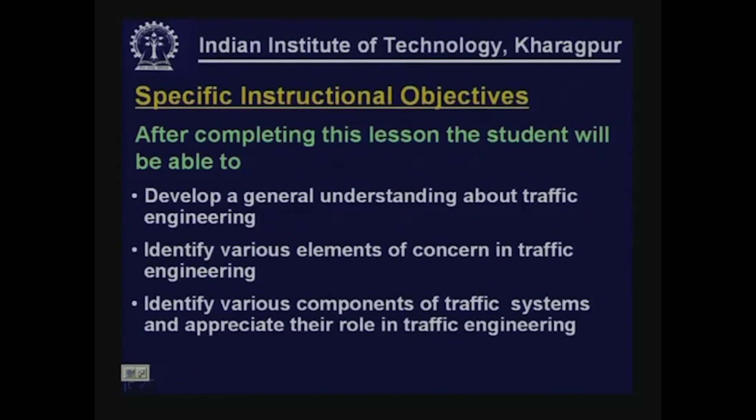Introduction. Let us first try to understand the subject area traffic engineering. What is traffic engineering? Traffic engineering is that phase of engineering which deals with safe and efficient movement of people and goods on streets and highways. So it deals with safety and efficiency of movement of people and goods on the road system, that is streets and highways. The Institute of Transportation Engineers defines traffic engineering.

Traffic engineering is that phase of transportation engineering which deals with planning, geometric design and traffic operations of these three aspects on the road system, that is roads, streets and highways, their networks, terminals, abutting lands, and relationships with other modes of transportation. That is how the Institute of Transportation Engineers defines traffic engineering.

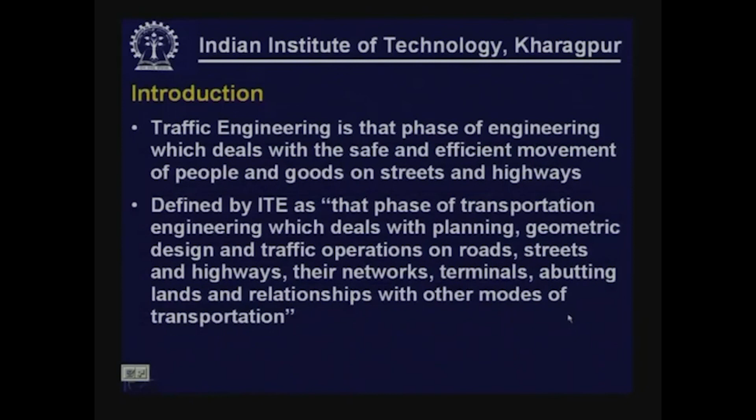With this background definition, let us now try to address some of the basic issues in traffic engineering perspective, basically to create our mindset about the traffic engineering elements.

First issue is whether it is person movement or vehicle movement. Often we face this confusion in traffic engineering: what is our primary concern, whether it is person movement or movement of vehicles. It is worthwhile to mention that the real concern is movement of people and goods.

So moving people and goods is the real concern. Obviously, movement of vehicles is just a way of accomplishing this. So primarily people need to move from one place to another place, and goods are to be transported from one place to another place. So the primary concern is movement of people and movement of goods.

How are these people or goods transported? Vehicle is the means for that. They are transported in vehicles. So vehicle comes afterwards, and it is the resulting volume that is creating road congestion and many peripheral problems in traffic engineering.

But let us not forget that the primary concern is movement of people and movement of goods. Of course, it does matter the way it is transported in vehicles. So we cannot really deny the role of modal split, that means how the demand is distributed into different modes and other modal characteristics. So it is worthwhile to mention that it is necessary to appreciate the mode of transport and type of roadway used for moving people and goods.

What is the effect of mode? What is the effect of roadway type? What is the effect of mix of traffic? All three aspects are also important.

So obviously, the effect of roadway type is also important, and we cannot deny the effect of mix of traffic, or traffic composition, in the overall traffic engineering perspective.

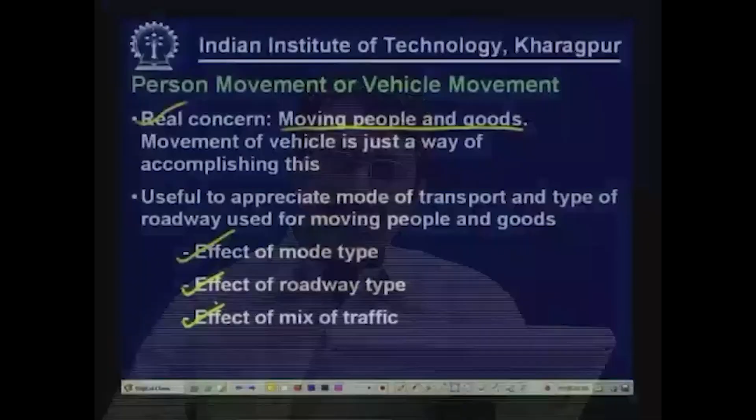The way demands are distributed, it is the same road space which is used by cars, buses, commercial vehicles - light commercial vehicles and heavy commercial vehicles. So the way the road system accommodates traffic, the nature of traffic, the mix of traffic - it really matters and influences the performance and overall characteristics of traffic operation. So effect of mode, effect of roadway type, and effect of traffic mix - all three are very important in traffic engineering perspective.

Now the second question is goods movement and or person movement. In many occasions we think road is primarily for passenger movement. We see cars getting congested, and with car volume, roads get congested. Presence of a few commercial vehicles like trucks or other heavy vehicle types even aggravates the traffic congestion problem.

So we apparently think road is primarily for movement of passengers and trucks are some sort of disturbing elements, because they really do create problems. But let us not forget that goods transportation provides the lifeline to any community. It directly adds to economic development. It is necessary to transport raw materials and also the finished product. Both are important.

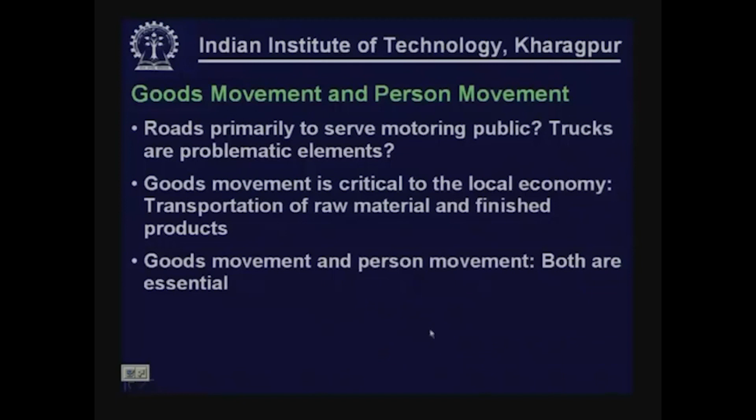Next is the mix of vehicles in person movement. Person movement is normally accomplished by sharing the demand into different types of modes. In traffic engineering, our focus is generally on movement on streets and highways, excluding for the moment rail, water and air transportation. So within and between cities and towns, people normally move in a mix of vehicles, namely private vehicles, buses, paratransit systems, bicycles, and even walking.

Different modes of transportation exist, and each mode has its own utility in the overall system, from walking to movement by bicycle or non-motorized transport, to faster travel like car and bus movement. Every mode has its own contribution in the overall transportation system. The beauty of the road system is that the same road space must be used for movement of various vehicle types. In certain contexts we may restrict some vehicle types during certain periods, but all vehicle types are to be accommodated.

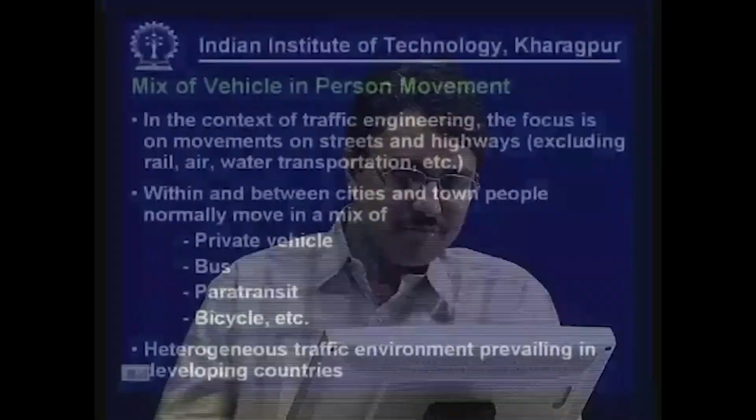You have system of facilities, basically the road system. We shall discuss each of these components in detail. So we have the supply side, or system of facilities, and demand, and they interact with each other in a transportation system through the interface of control. This interaction creates operational performance, congestion, and all sorts of other things. Influencing the demand is another aspect - can we influence the demand, should we influence the demand, and if so, in which ways? Then measuring the performance of the overall transportation system, and transportation systems management.

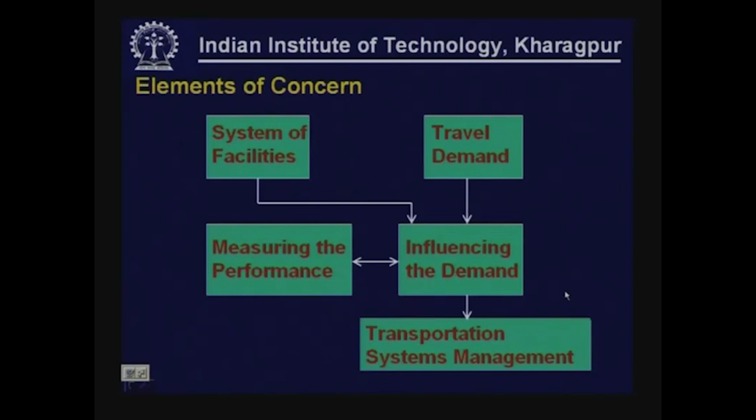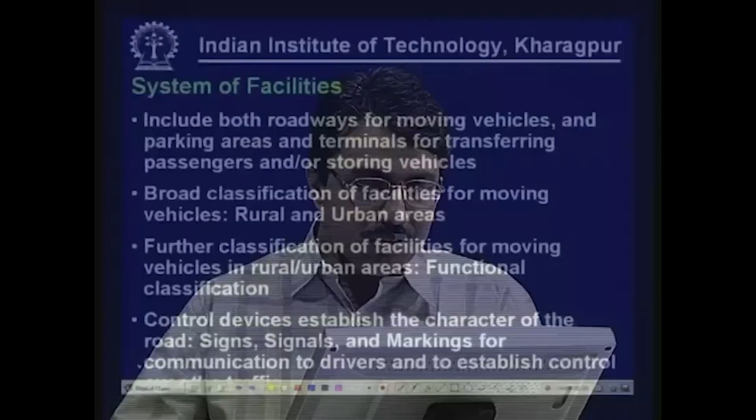So these are the five major elements of concern, and let us try to understand each in detail. First, system of facilities. System of facilities normally includes the physical road system - it is essentially the supply side of a transportation system. It includes roads used for moving vehicles, parking areas, terminals and other physical facilities, and also control devices present on roads, for example signs, signals, markings - these are all physical facilities.

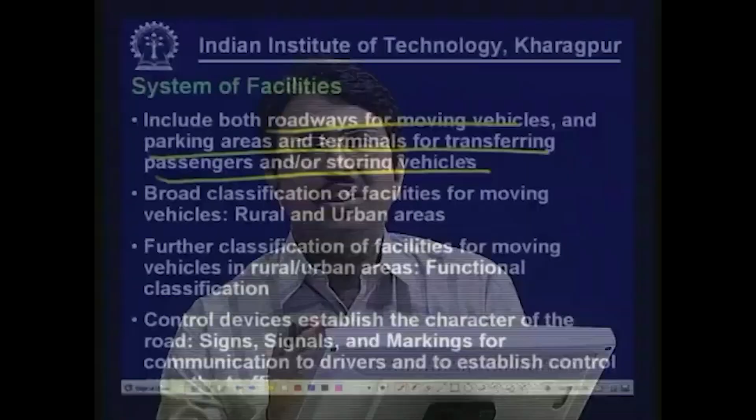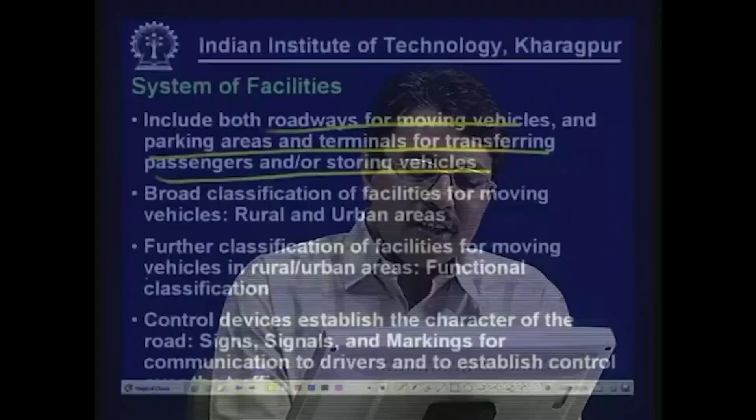So system of facilities includes both roadways for moving vehicles, and parking areas and terminals for transferring passengers and or storing vehicles. Now, road systems in urban areas and rural areas are fundamentally different - the type of system, the purpose, they all may be different. So primarily we consider two types of road systems, urban and rural areas. Rural essentially means non-urban areas, so we normally call them rural roads or rural area highway roads. Further classification of facilities for moving vehicles in rural and urban areas is done based on functional classification.

That is again an important aspect. Not all roadways, even in an urban area or a rural area, serve the same purpose. Two aspects are important. A road may serve the purpose of providing access, and it may also serve through traffic movement, meaning faster movement of long distance traffic. Often these two aspects are important, how much a road provides access and to what extent it handles through traffic movement. Measuring these two functions and their level of influence defines the functional classification of roads.

We define a hierarchy of roads, where in some cases the whole objective is through traffic movement, in the extreme end the whole purpose may be providing access, and there could be other types of roads which serve a combination of both aspects, some more, some less. So that functional classification is important. We shall also learn the functional classification in due course of time.

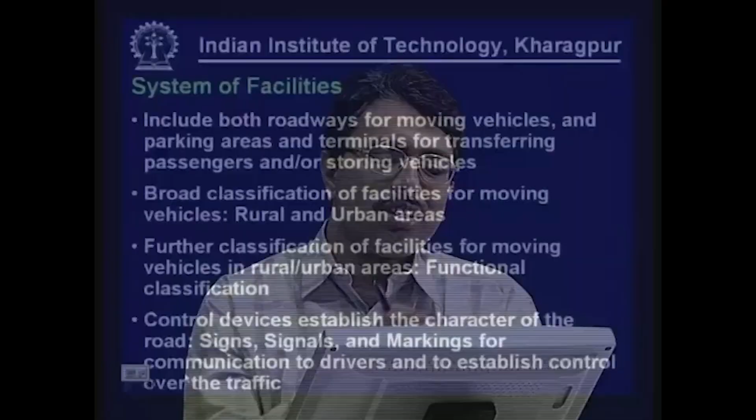Then we have control devices. These generally establish the character of the road. These control devices include traffic signs, traffic signals, road markings, and all these are essentially for communication to drivers and establish control over the traffic. Controlling the traffic or looking at the operational aspects of the traffic is also important, how to improve the efficiency of traffic operations for a given facility and a given demand system. So there the control devices will play a vital role. This also defines the system of facilities.

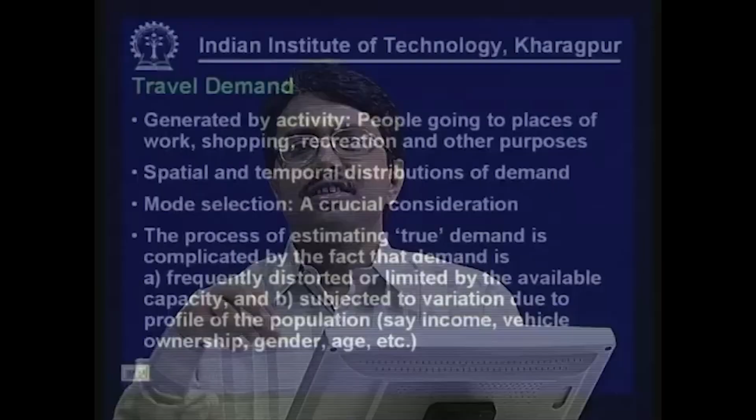Then the second aspect is the travel demand. We all know that demands are generated by activities. People live somewhere, they need to travel to various places, places of work, places of shopping, places of recreational facilities. So for different purposes they need to travel, and there is spatial distribution. Residences are located somewhere, activities are located somewhere, and that is what generates the travel demand. The spatial distribution of activities generates demand. Because demand is there we need to provide supply, and supply also influences the demand pattern, so it is a two-way interaction. It is basically generated by activity, and both spatial and temporal characteristics of distribution of demands are important.

Let us try to understand the spatial and temporal distributions of demand. Because facilities are located in different places, demand has also got a spatial dimension. If offices are located somewhere in the CBD and residences are located in the suburb, then it is obvious that during the morning peak hours the travel will be from residences to the CBD or office area, and in the evening people again need to come back. So there will be demand between office areas or the CBD and the suburb.

Not all places are equally loaded over the whole period of time. Some roads are loaded, some are free, and at some time there may be congestion, at other times no congestion on the road. So it varies over distance, over space, and it also varies over time. Going back to the earlier example, people going to office, maybe between 9 to 10 all the roads towards the CBD area will be congested. At 12 o'clock those roads may not be congested, because primarily they serve demand towards the CBD area or where main offices are located. So the same road that is highly congested at 9 o'clock may have no congestion at 12 o'clock. Demand has both spatial and temporal characteristics, and this must be understood clearly to address traffic engineering and related issues.

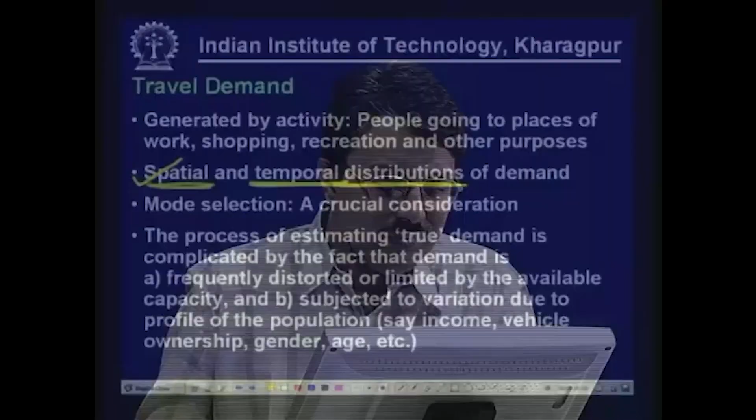As I indicated earlier, mode selection is a crucial consideration, because for the same person or passenger demand, mode selection or mode split decides the actual traffic volume and therefore the actual level of congestion on road at a given time.

Remember that the process of estimating true demand is often complicated by the fact that demand is frequently distorted or limited by the available capacity. All physical facilities are capacitated. A road can handle only a certain number of vehicles or a certain volume of vehicles. So even if the demand is more, the road cannot accommodate traffic volume higher than its capacity. The demand may be distorted or limited by the available capacity.

Demands are also subject to variation due to profile of population, such as income, vehicle ownership, gender, age, and other socioeconomic attributes. If you see the trip rate, the per capita trips made in a day, it is influenced by income and by car ownership. Normally high income households make more trips. Higher personal income means more trips, higher vehicle ownership means more trips. So all these socioeconomic characteristics also affect or influence the demand pattern, and that makes the whole demand estimation a complex task.

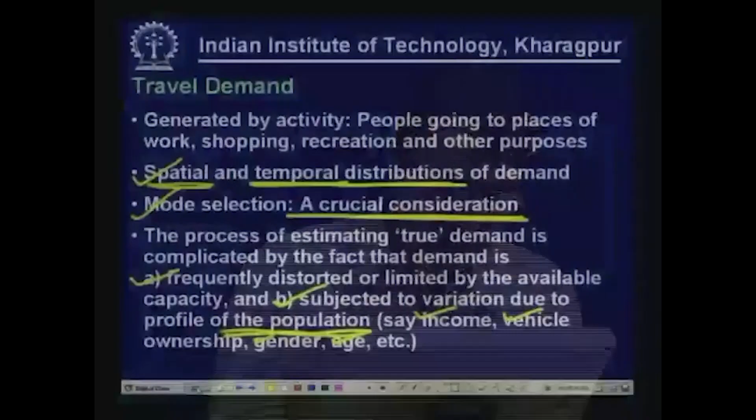Next is influencing the demand. Now, a traffic engineer's job often starts with a given pattern of demand.

This is just an example. If we see the volume of traffic on a road versus time, you normally get a pattern like this, sometimes with two peaks. In the morning when people are going to offices, the traffic volume is more, the road is congested, then it comes down, and again in the evening when people are coming back or going to shopping or recreational places, the demand is more again.

It is interesting to note that the capacity of a system is fixed, as shown by this dotted line. This is a fixed value. So capacity is fixed, while demand most of the time is maybe lesser than the capacity. At night, demand is practically nil, but capacity does not change, it still remains the same.

So it is only at certain hours of the day that demand becomes more than the capacity, and congestion is created. So it may be worthwhile, wherever applicable, to think of influencing this demand pattern to make better use of the available capacity.

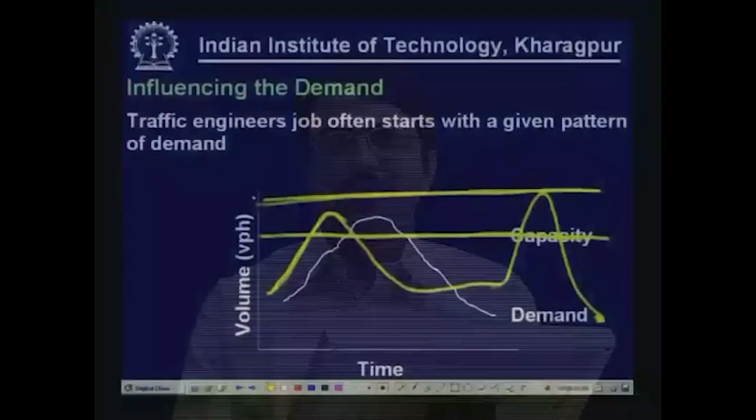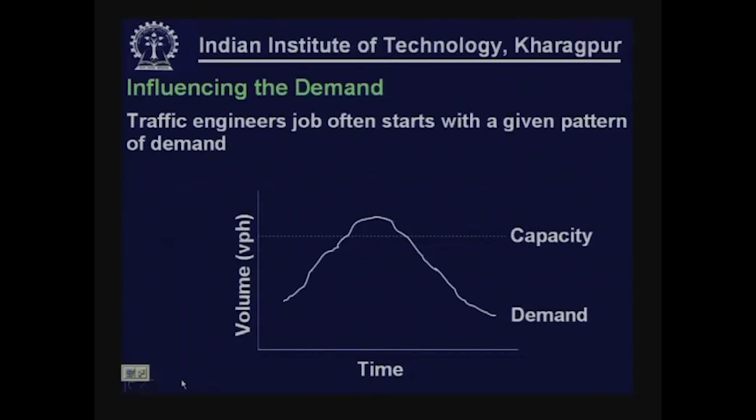Rather than that, can we touch or influence the demand, so that within the given road system, within the available capacity, we can have better utilization of that capacity? That is why it makes sense to influence the demand.

There are three different ways that we can influence the demand. One is shifting the temporal distribution of demand. I have already mentioned that demand has a temporal nature, at 9 o'clock the road is highly congested, at 11 o'clock it may be relatively free. So shifting the temporal distribution of demand is one way we can influence it.

Reduce the magnitude of the demand. Can we really reduce the magnitude of the demand itself? That would be very meaningful in the overall perspective. Then another approach is to repackage the demand. We shall discuss all these three approaches in detail.

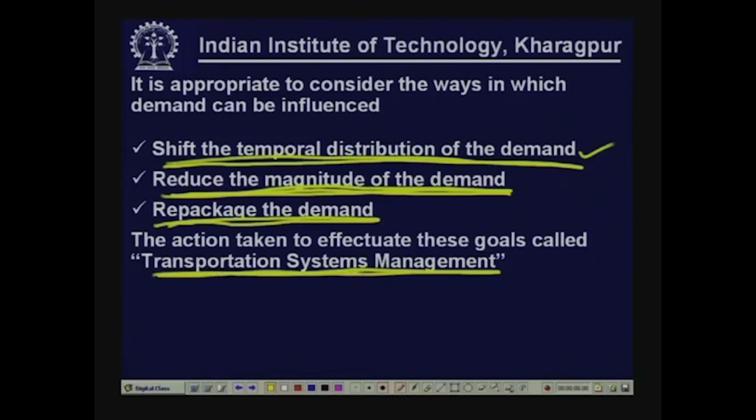Now, the action taken to effectuate these goals of influencing demand is called transportation systems management, the other elements of concern that I have mentioned.

Shift the temporal distribution of demand. By this time, I am sure you will all appreciate that the problem may not really be too much demand, but too much demand at the same time.

If you see, in the midnight and early or late hours, the demand is practically nil. So considering a 24-hour span in a day, it is not that demand is very high compared to capacity overall. Rather, the problem is too much demand at the same time. So it does make sense to influence the demand by trying to shift its temporal distribution.

As the peak period is largely a work trip peak, since most of the morning and evening peak traffic consists of vehicles used for work trips, shifting the demand is really meaningful.

What I mean by shifting demand is shifting the peak hour demand, that is, mitigating it. Let the total demand remain the same, but can we distribute the peak hour demand over a larger period of time, so that at no hour does demand exceed capacity? Reduce the peak, spread it over longer hours.

That can be achieved by staggered work hours or variable work hours. Let us try to understand this concept. In most cities or towns, all offices may start at 9 o'clock. If so, you would expect everybody to be going to office between 8 and 9 o'clock, generating maximum demand during that hour, and all the road systems become congested.

Can we not think of a system where some offices start at 9 o'clock, some at 8 o'clock, some at 10 o'clock, and accordingly the closing time also changes? Instead of everyone closing at 4 or 5, some will close at 4, some at 5, some at 6. Still there will be enough common working hours for interaction, exchange of ideas, meetings and other work. So by keeping sufficient overlaps, we can stagger the time. This brings tremendous benefit because the complete demand is served better with the same road system, same facilities and capacities, and people enjoy better quality of service. Roads will definitely become less congested by this mechanism.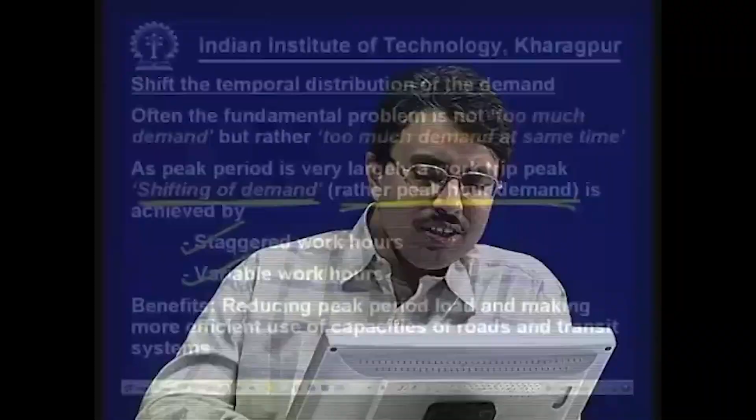If you look at the benefits, reducing peak hour load through these mechanisms makes more efficient use of road capacities and also the transit system. During peak hours transits are often overloaded, buses are completely full. If we can stagger the demand, the load on the transit system will also be reduced and spread over a longer time. So the benefit is less crowding on transit and better utilization of capacities.

Now, how can we reduce the magnitude of demand? Remember that travel demand may be measured in terms of a combination of total trips and length of trips, say person kilometer travel. This is actually a more rational quantification of demand. If we only count the number of trips, we may ignore whether they are short or long trips. So considering a combination of total trips and lengths, such as person kilometers, gives a rational and balanced measure of the magnitude of demand.

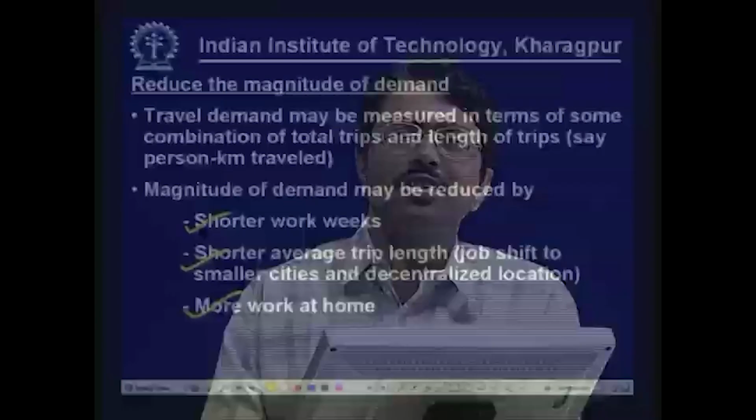Magnitude of demand may be reduced through shorter work weeks, shorter average trip length, and more work at home. All of these are possible, nothing is impossible. Shorter work weeks means instead of a 6-day week, it could be a 5-day week, with total working hours in the week remaining the same. If some offices operate on a 5-day schedule and others on a 6-day schedule, the starting and closing times will differ. A 5-day week means longer working hours each day, while a 6-day week means relatively shorter hours each day. So not everyone will go to office at the same time, which again brings benefit—we reduce demand during peak hours with several resulting benefits.

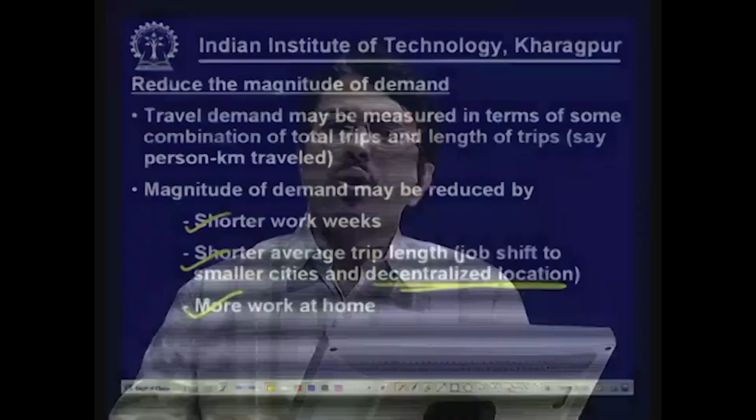Shorter average trip lengths can come from job shifts to smaller cities and decentralized locations. In many cities in developing countries, all head offices are located in the capital city. While a majority may need to be there, in many cases people from the states need not come to the capital. You can have district or zonal headquarters instead—decentralizing so that not everyone needs to travel to the CBD area or the same town for every piece of work. That can reduce the total demand.

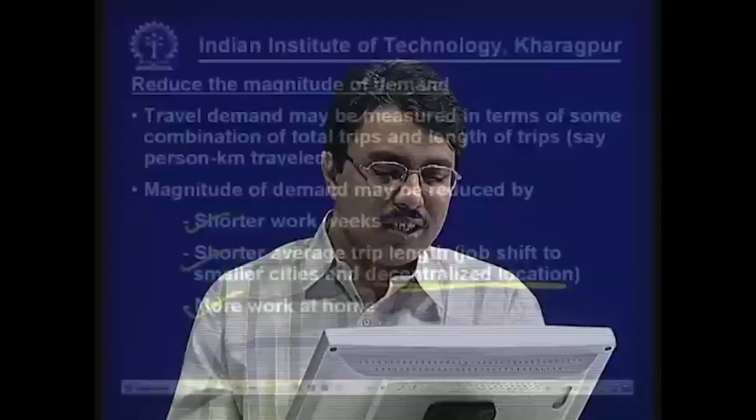More work at home is also a feasible option, because with the development of computers and networking facilities, many things can be done from home, substantially reducing overhead costs for physical facilities. Instead of a big office in an expensive area with high land or rental costs, a smaller office can suffice while productivity remains comparable. People can work from home, exchange ideas, interact, without everyone going to the office every day. This may sound surprising, but with computers and networks it may certainly work for some industries, some types of jobs, at least for some employees. So if we make use of these computer and networking facilities, we may be able to reduce travel demand, at least to some extent.

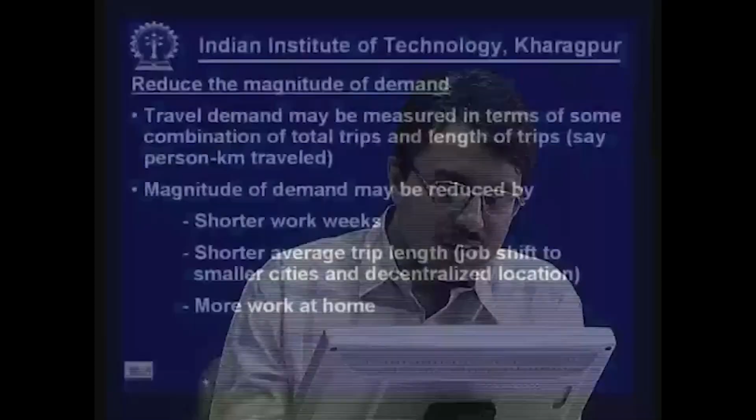Repackage the demand. Remember that we are talking about repackaging - total demand may still be the same in terms of person movement, but we are trying to repackage the demand. Let us see how we can repackage the demand.

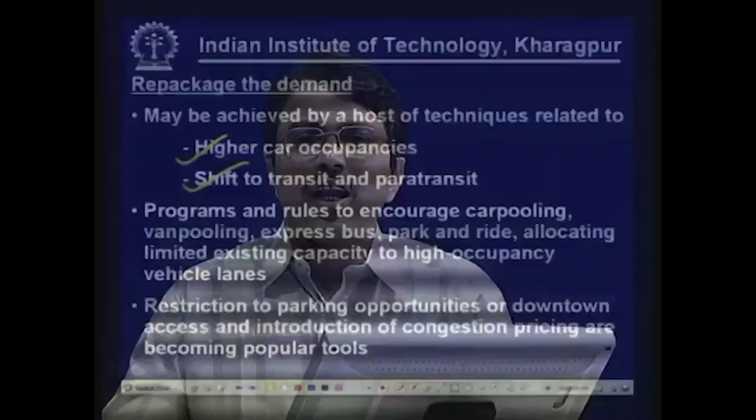Through higher car occupancies, shift to transit and paratransit, the same volume of passengers may be transported but with a lesser number of vehicles. That means it may be possible to allow a vehicle to take a shorter route when the occupancy of the vehicle is higher - maybe for a car there should be at least 3 occupants if you want to use the shorter route. If it is only 1 or less than 3, the vehicle will be forced to take a longer route. So people will be encouraged to achieve higher occupancy of the vehicle.

The result or benefit to the community is substantial. If 3 people are traveling in the same vehicle, instead of 3 vehicles it is now 1 vehicle. More people switch over to mass transportation or public transportation systems, so again there is reduction in vehicle volume, meaning lesser congestion on roads. So benefits are multidimensional - benefits in terms of capacity utilization, better mobility, better travel speed, and better environmental aspects.

Programs and rules to encourage carpooling, van pooling, express bus, park and ride, and allocating limited existing capacity to high occupancy vehicle lanes - these are different ways and means for repackaging the demand.

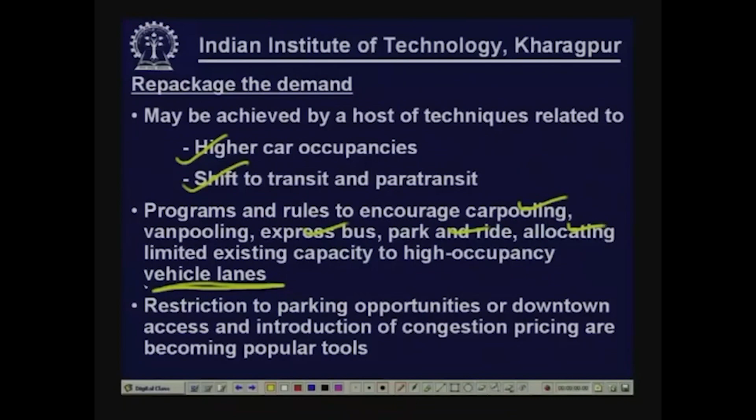Carpooling means instead of 3 people taking 3 cars going to the same office area from the same residence area - say it's a 6 day week and everybody is taking his own car to the office - instead, if 3 of them use carpooling and decide every 2 days in a week one person will take his car and all 3 will travel in the same car since they start at the same time and go to the same area. So instead of 3 cars it is 1 car now. Congestion is reduced and all sorts of benefits may be achieved.

Similarly with van pooling, one vehicle carries many people traveling together. This kind of repackaging may be encouraged by restricting parking opportunities. If parking space is limited, you may not get a parking space, or you may have to park your vehicle at a much more distant place, or there may be some kind of parking charges. These are all indirect ways to encourage people to use the mass transportation system or use repackaging facilities like carpooling, van pooling and other things.

So congestion pricing also could be taken as an instrument to encourage this kind of achievement.

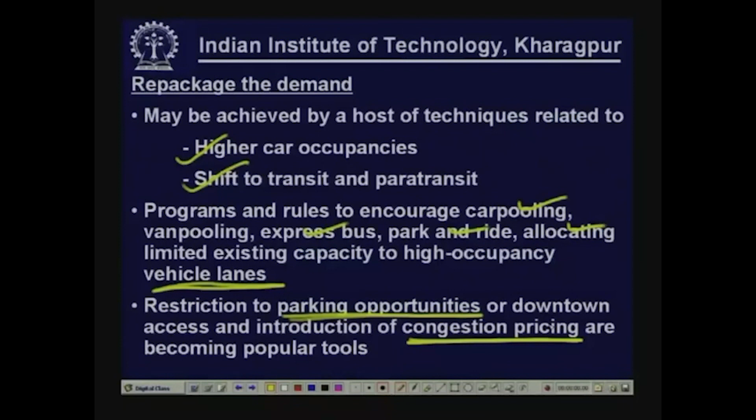So for quantifying the cost and benefit it is also useful, and for communicating results to both technical and non-technical audiences - observe it carefully. You may be doing a lot of engineering and other work, but finally you have to communicate the results to technical and non-technical audiences. If you can quantify it in a proper way and say this is the benefit or gain from this activity, it will be easy for others to appreciate your effort and accept the suggestion.

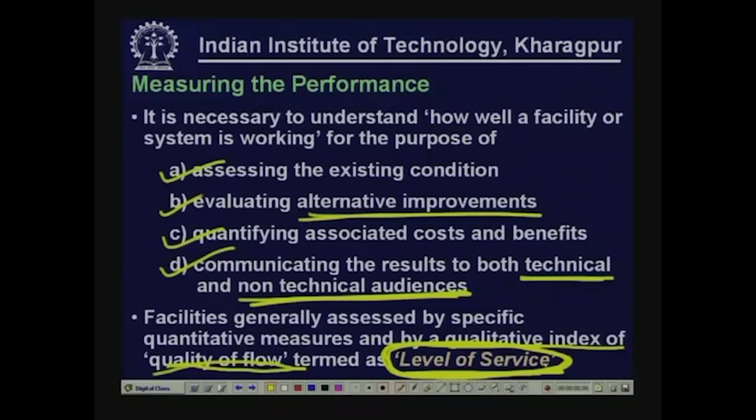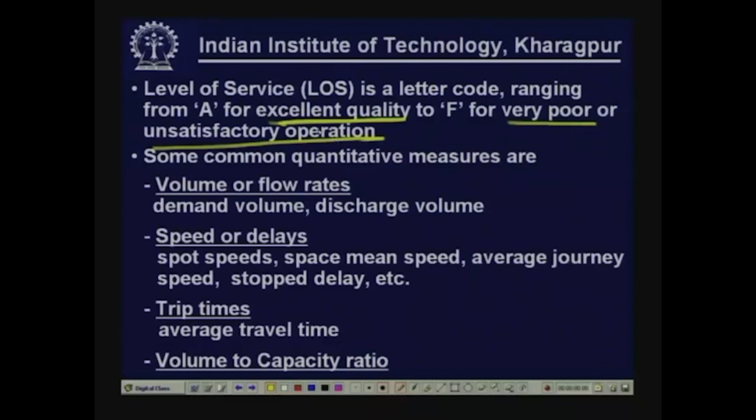Facilities are generally assessed by a specific quantitative measure and by a qualitative index of quality of flow called level of service. This term describes the quality of traffic operation on a facility. Level of service is a qualitative aspect, normally expressed by a letter code ranging from A to F. A indicates excellent quality, F indicates the worst or unsatisfactory operation, with B, C, D, E in between.

We often use a quantitative basis also for defining level of service, and that is known as measure of effectiveness. Measure of effectiveness is a quantitative basis for defining level of service.

Some common quantitative measures used as measure of effectiveness include volume or flow rates, traffic volume expressed as demand volume or discharge volume, speed or delays including spot speed, average journey speed, stopped delays, and trip times such as average travel time for trips.

Sometimes it is more rational to use volume to capacity ratio rather than volume alone, because 2000 vehicles on a single-lane road, a 2-lane road, or a 3-lane road have totally different effects. So instead of using only volume, it is more logical to use volume to capacity ratio, which shows the relative loading or demand on the road as compared to its capacity, or to what extent the road system is loaded.

Sometimes one can use aggregate system measures like total travel time, vehicle kilometer travelled, person kilometer travelled, and vehicle kilometer delay. All these can be considered as measures indicating aggregate system performance.

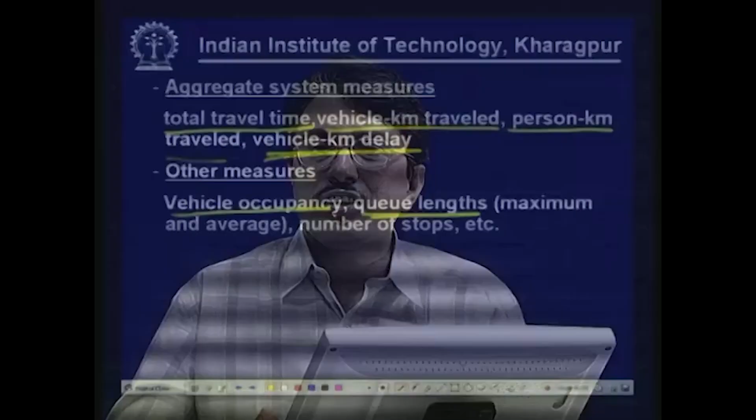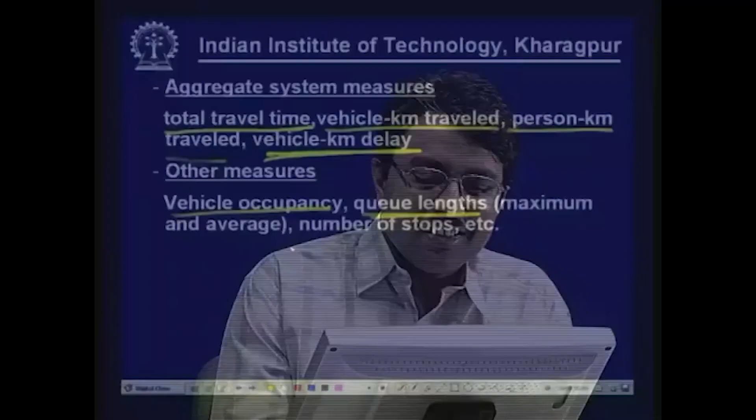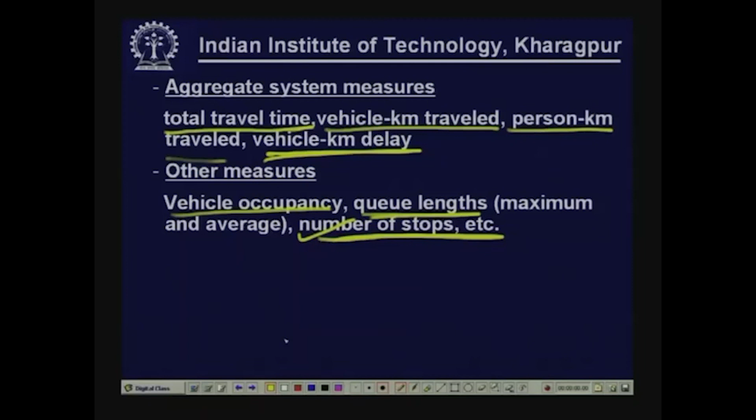There are other measures too, such as vehicle occupancy and queue length. Queue length is particularly relevant for signalized intersections, where performance can be measured in terms of average or maximum queue length during peak hours. Sometimes measures like number of stops made during a journey are also used. All these quantitative measures are used for defining level of service.

Now coming to transportation systems management, we have already created a background for it. This essentially means application of methods and procedures for increasing the efficiency and utilization of existing facilities, consistent with making better use of existing resources rather than planning major new construction, because adding supply-side capacity is a capital-intensive approach that takes money.

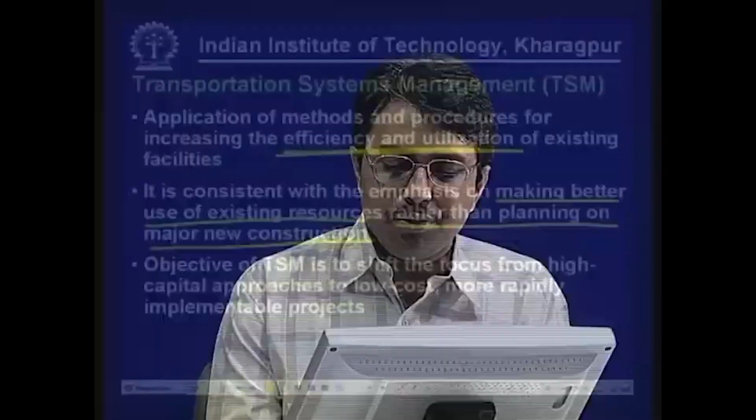In the majority of developing countries we have serious financial constraints, so such approaches may be more meaningful since they help ensure better utilization of existing facilities rather than just building roads and enhancing capacity. The objective of TSM is essentially to shift focus from high capital approaches to low cost, more rapidly implementable projects.

In developing country contexts, TSM techniques have a vital role to play because we have limited resources and our cities, in majority of cases, are not properly planned. It's very difficult even to construct or widen roads because of surrounding buildings and permanent structures. So TSM techniques can be very instrumental for improving traffic operations in urban areas, being low cost and more rapidly implementable, though they require willingness to accept and implement them in reality.

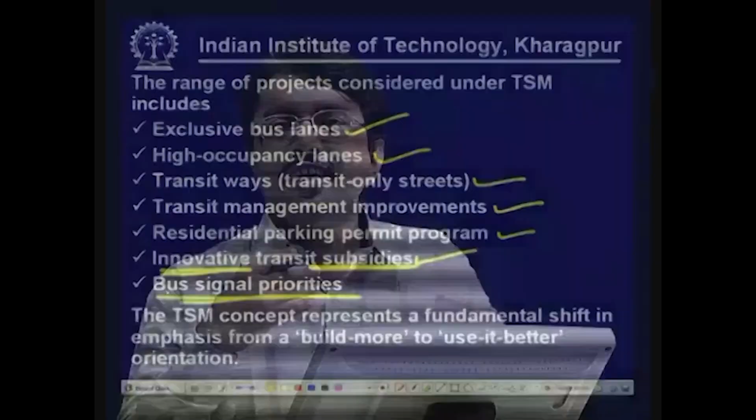The range of projects considered under TSM, which I have already given background on, includes exclusive bus lanes, high occupancy lanes, transit ways, transit management improvement programs, residential parking permit programs, innovative transit subsidies, and bus signal priorities. You can see that the majority of these projects are intended to encourage the use of mass transportation systems, either directly or indirectly, rather than personal vehicles.

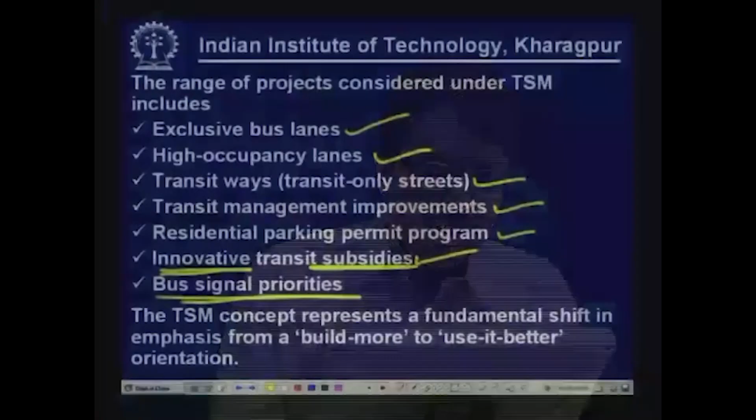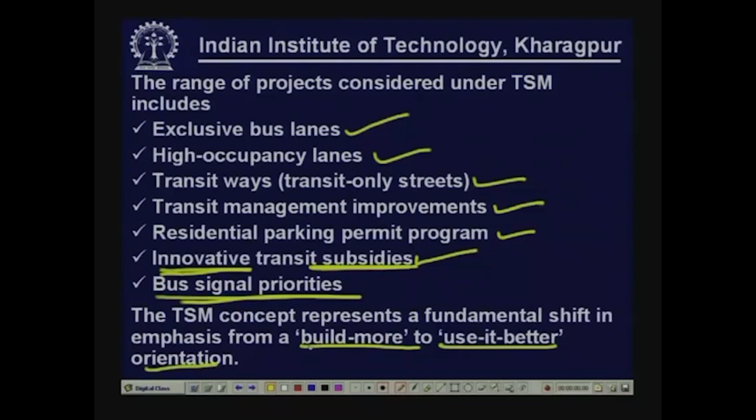The TSM concept represents a fundamental shift in emphasis from build more to use it better orientation. It is a shift in approach from build more to use it better.

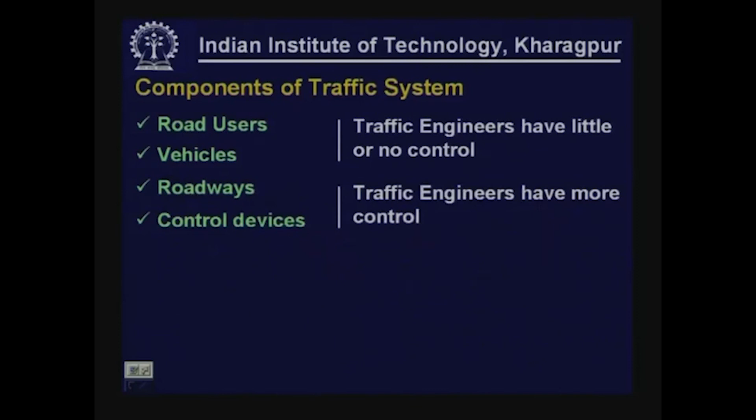Now let us quickly look at the components of traffic system. You have 4 components: road user, vehicles, roadways, and control devices. Traffic engineers normally have very little control over the first two aspects, road user and vehicles, but certainly they have better control over roadways and control devices. Let us quickly go through these aspects.

Road users, human elements, separate traffic engineering from most other engineering disciplines, because human elements are involved in it, driver behavior and user behavior, and that makes it different from most traditional engineering disciplines.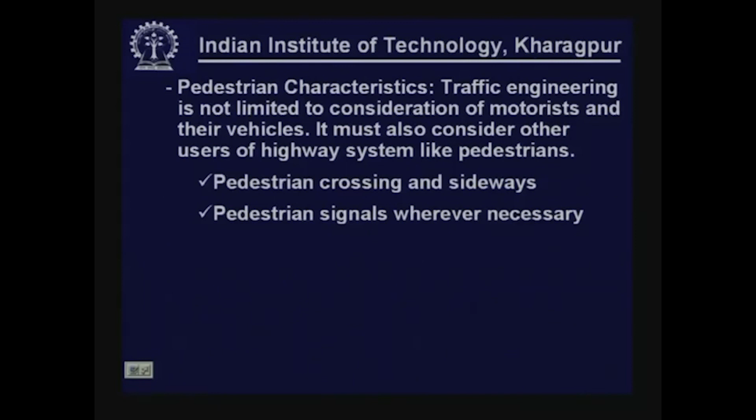Then pedestrian characteristics are also important, because traffic engineering is not limited to consideration of only motorists and their vehicles. It must also consider other users of the highway system like pedestrians. They are essential elements of a transportation system or traffic system. So pedestrian crossings and sidewalks, even pedestrian signals, providing pedestrian signal phase wherever it is necessary and appropriate.

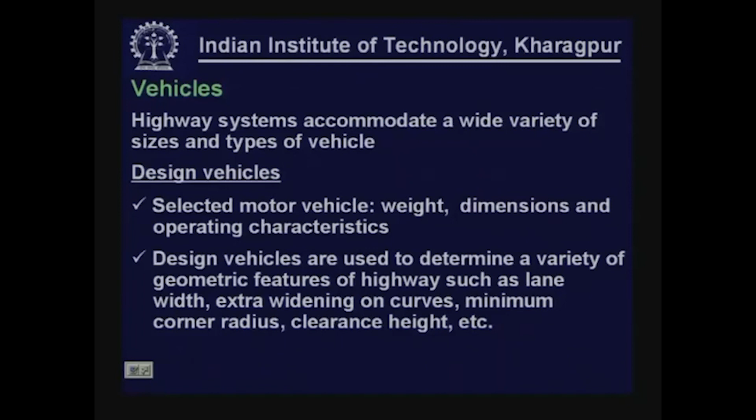Then the vehicles, there are a variety of vehicle sizes and types of vehicle. So when we design the road, we consider them in the design process, taking into consideration all these characteristics to arrive at a design vehicle. Design vehicle is normally the one whose weight, dimensions, and operating characteristics are used for deciding the geometric features. Again, we will talk about design vehicles during our discussion about the geometric design process.

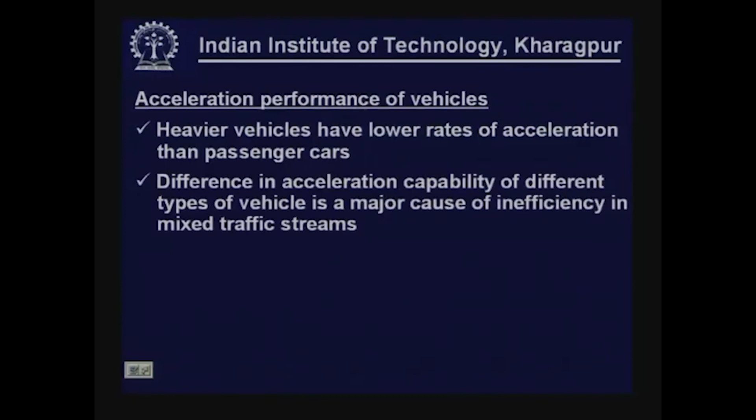Acceleration performance of vehicles is again an essential characteristic that comes into the design process. Braking performance of vehicles, you will see that is a very vital consideration. We consider the sight distance, and we will discuss in detail all these aspects in the geometric design part, and you will see how braking performance is used in making the design elements, particularly the stopping sight distance requirement.

Coming to the roadways, I have already discussed about the need for functional classification. You will see we try to design the roads to provide safe and efficient movement of persons and goods. So we go for geometric design. We have a separate module under geometric design where we will discuss at length about each and every aspect.

You will see that we design cross section elements, we design horizontal elements, we design vertical elements, considering the vehicle characteristics, considering the roadway characteristics, and try to make a safer design which will ensure safe and efficient movement of traffic on roads and highways.

Finally, the traffic control devices, remember that they are for the communication of traffic laws and regulations to drivers. So through control devices, we tell drivers what they are supposed to do, what they are not supposed to do, and there are different control devices like road markings, traffic signs, and traffic signals.

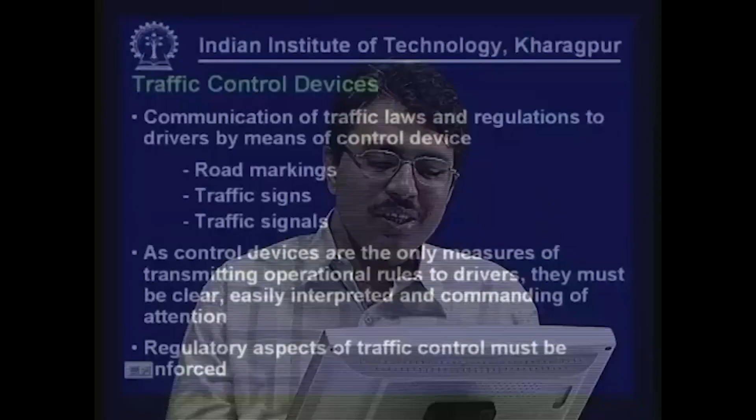Remember that control devices are the only measures of transmitting operational rules to drivers. When vehicles are traveling, they all know about the operational rules and regulations through the control devices. A signal will tell the vehicle you should stop now. Signs will tell the vehicle what they are supposed to do and what they are not supposed to do. So they are the only measures of transmitting operational rules to drivers.

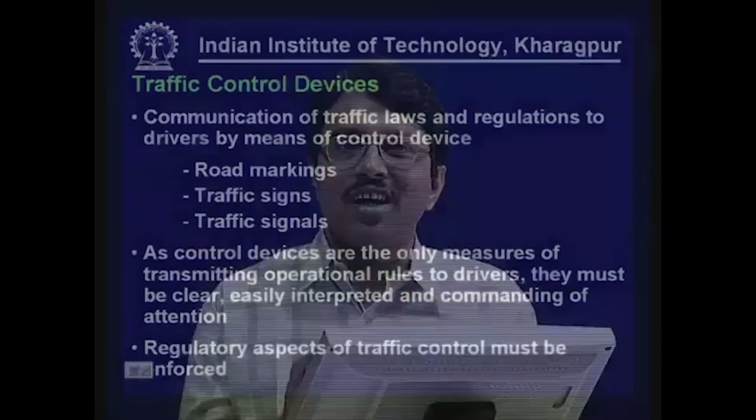So they must be very clear, easily interpreted, and commanding of attention. Shape, color, size of all the signs, all the control devices are very, very important. Finally, the regulatory aspect of control devices must be enforced so that people do not violate. If the sign is there, they should obey that. If the signal is there, they should obey that, and that is again to be enforced. All these aspects are to be enforced, so that is again an essential component.

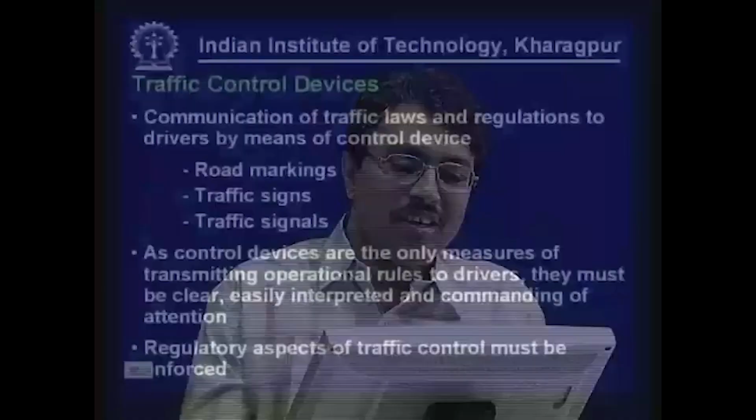Now let me quickly ask you some questions. Why is it meaningful to attempt to influence the travel demand? Discuss different ways of influencing the travel demand. Number 2, explain the necessities for measuring the performance of a transportation system. Number 3, explain your understanding about transportation systems management. And the last question is, identify major components of traffic systems.